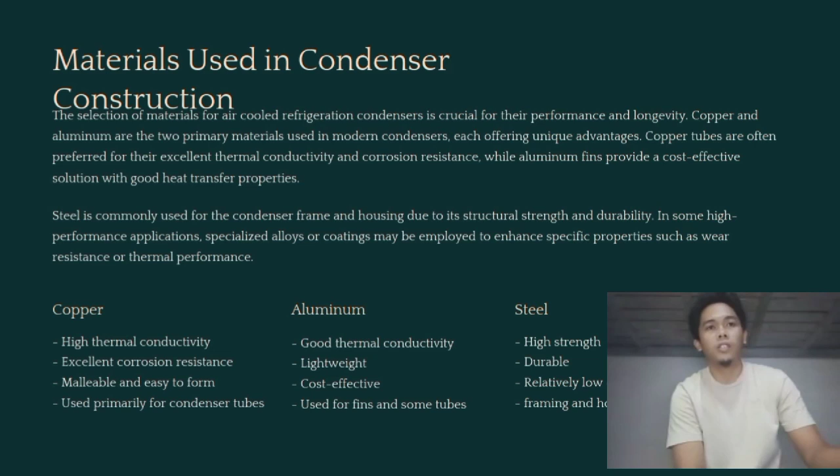So, in some high performance applications, specialized alloys or coatings may be used to improve specific characteristics such as wear resistance or thermal performance. Overall, the combination of these materials ensures optimal performance and longevity of the condenser.

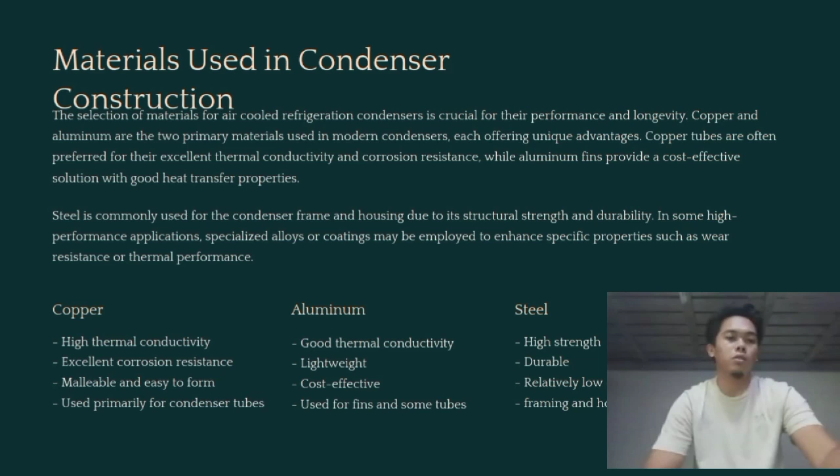So let's move on to the next page. So, material properties and structures.

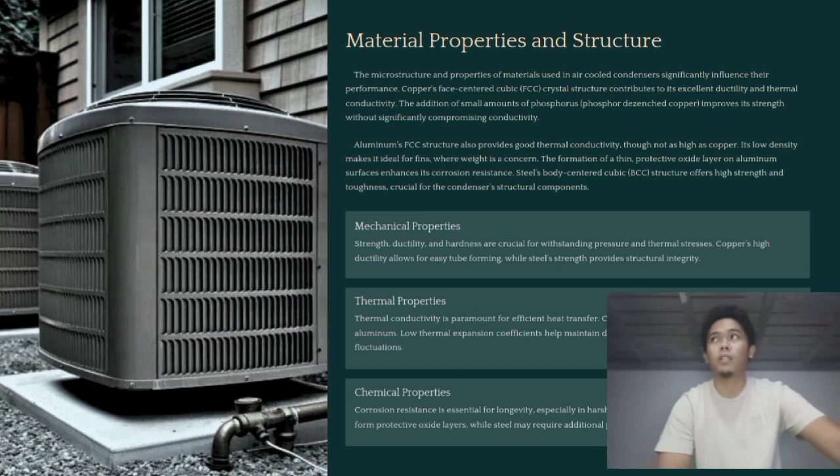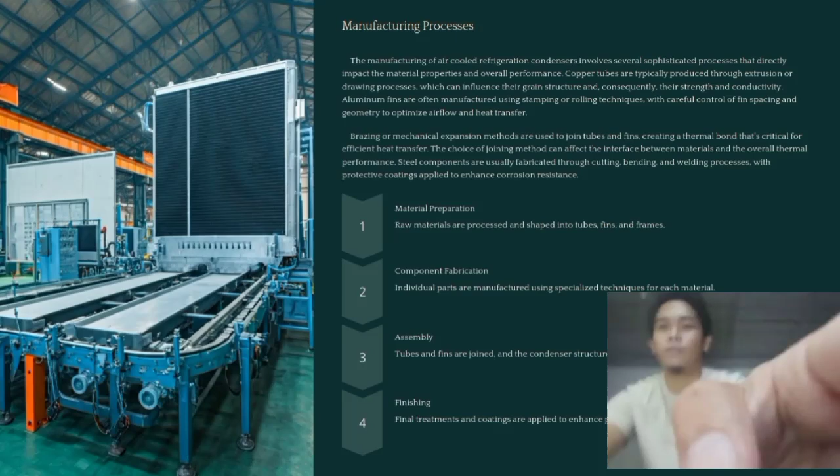So let's move on again to the manufacturing processes. The manufacturing of air-cooled refrigeration condensers involves several key processes that affect material properties and performance. Copper tubes are typically made using extrusion or drawing methods, which influence their strength and conductivity. Aluminum fins are produced through stamping or rolling, with crucial attention to spacing and geometry to optimize airflow and heat transfer.

Joining methods such as brazing or mechanical expansion are crucial for creating a strong thermal bond between tubes and fins.

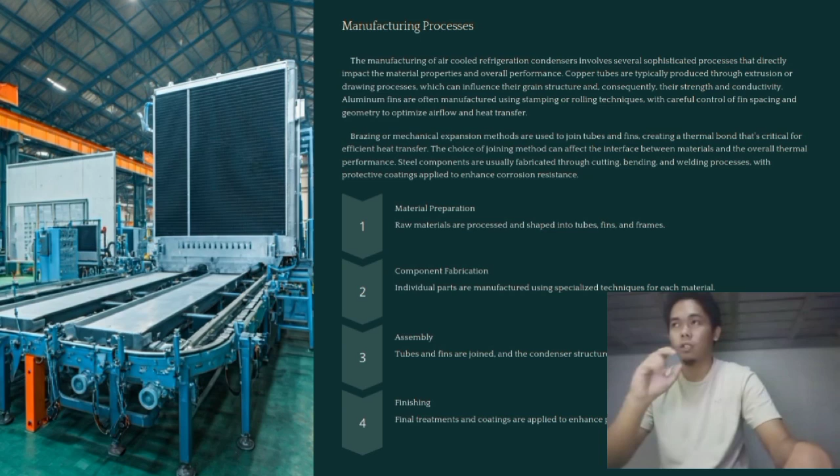So, strong thermal bonds between tubes and fins impact the overall heat transfer efficiency. Steel components are fabricated through cutting, bending, and welding, with protective coatings added to improve corrosion resistance. So the manufacturing process can be broken down into four main types.

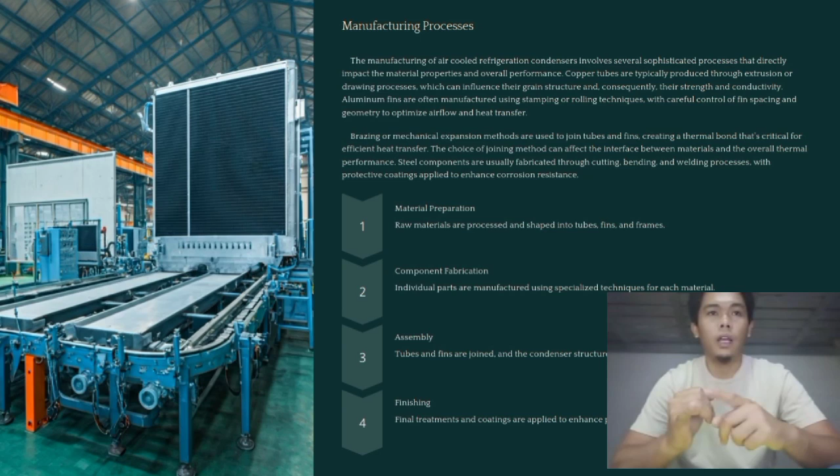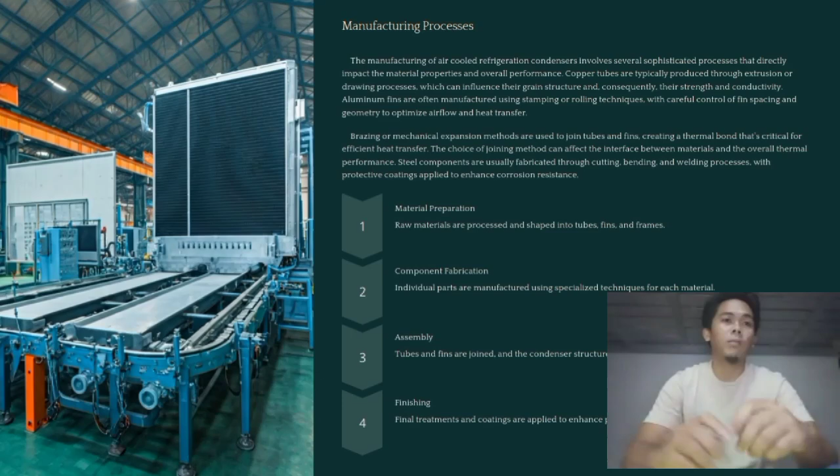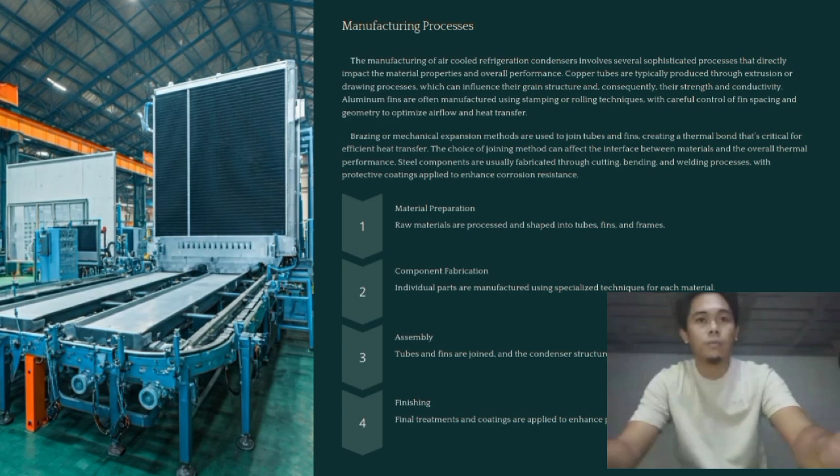So this selection of material for air-cooled refrigeration condensers requires balancing performance, durability, and cost. So while copper has excellent thermal properties, its higher price has led to a greater reliance on aluminum in various applications. With fluctuating prices of raw material, especially copper, it can affect manufacturing cost and influence material decisions. So manufacturers may use strategies like copper-aluminum hybrid design and advanced aluminum alloy to achieve better cost-performance ratios.

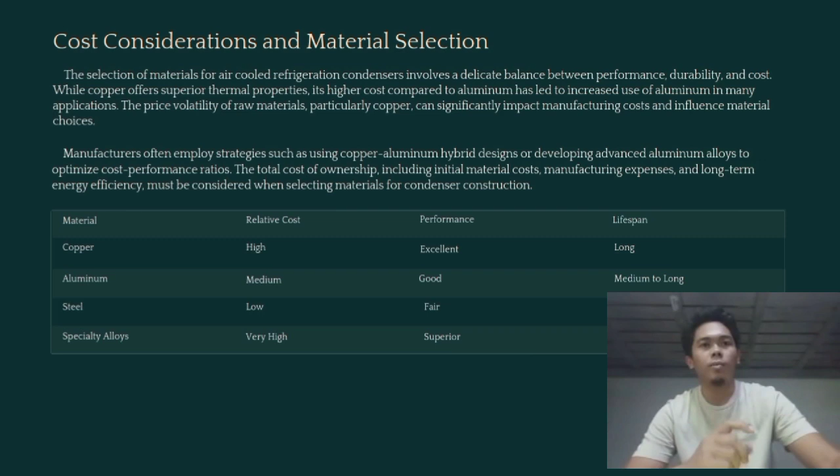So while copper offers superior thermal properties, its higher cost compared to aluminum has led to increased use of aluminum in many applications. The price volatility of raw material, particularly copper, can significantly impact manufacturing cost and influence material choices. So manufacturers often employ strategies such as using copper-aluminum hybrid design or developing advanced aluminum alloy to optimize cost-performance ratios. The total cost of ownership, including initial material cost, manufacturing expenses, and long-term energy efficiency, must be considered when selecting material for condenser construction.

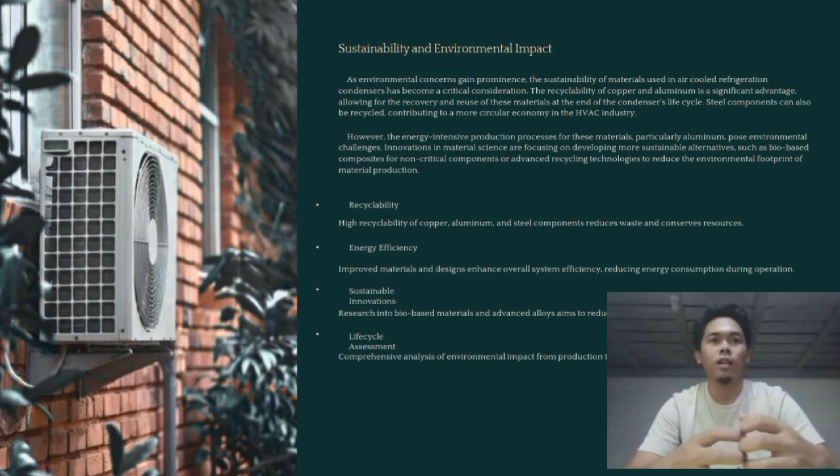So, however, the energy-intensive production processes for these materials, particularly aluminum, pose environmental challenges. Innovations in material sciences are focusing on developing more sustainable alternatives such as bio-based composites for non-critical components or advanced recycling technology to reduce the environmental footprint of material production. So, yung sa part na to, sustainability and environmental impact, yung pinaka-crucial nito na yung recyclability, energy efficiency, sustainable innovations, at saka life cycle assessment.

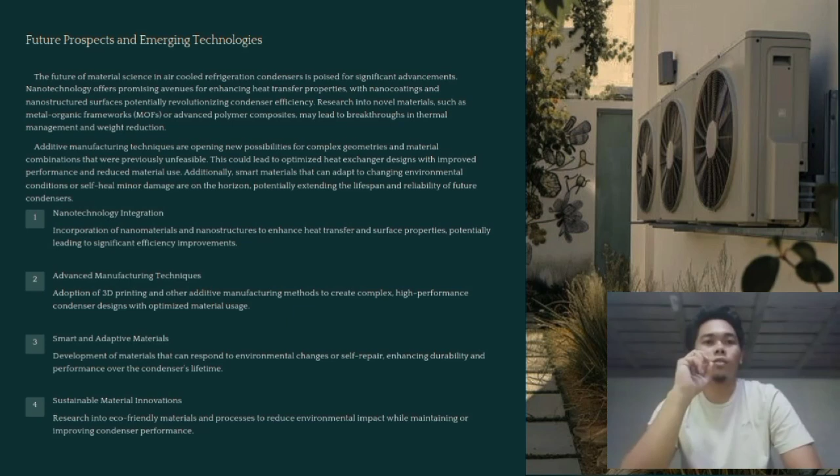So, future prospects and emerging technologies. So the future of material science in air-cooled refrigeration condensers is poised for significant advancement. Nanotechnology offers promising avenues for enhancing heat transfer properties with nano coatings and nanostructured surfaces, potentially revolutionizing condenser efficiency. Additive manufacturing techniques are opening new possibilities for complex geometries and material combinations that were previously unfeasible. This could optimize heat exchanger design with improved performance and reduced material use. Additionally, smart materials that can adapt to changing environmental conditions or self-heal minor damage are on the horizon, potentially extending the lifespan and reliability of future condensers.

So, nanotechnology integration: incorporation of nanomaterials and nanostructures to enhance heat transfer and surface properties, potentially leading to significant efficiency. So, advanced manufacturing techniques, smart and adaptive materials, sustainable material innovation. So, that's all my report.